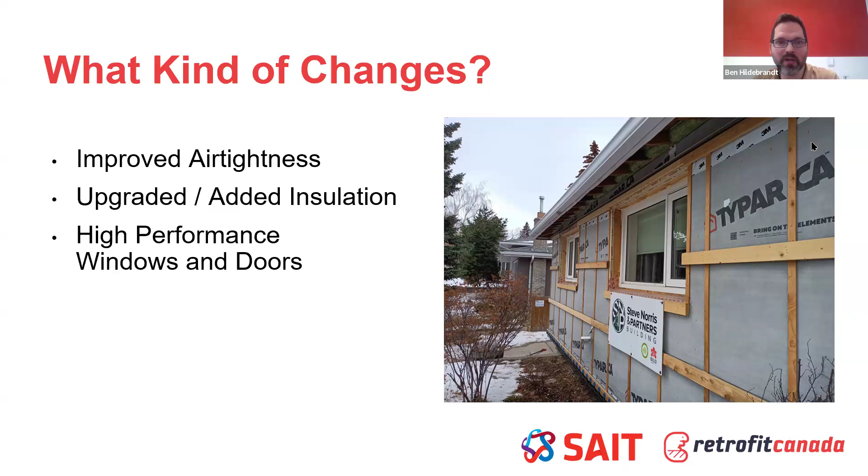And then with the envelope, we're also looking at improving the windows and doors. We want to make sure these are well insulating, and windows can be, in many cases, a thermal hole in the wall. So when we take the time to plan and specify higher performing windows, we can reduce the heat loss from those locations in the building envelope.

Once we tackle the building envelope, we're often in these retrofits looking at electrification. There's a significant number of homes, even in hydro-dominated grids like Quebec or British Columbia, where the space heating is provided by natural gas furnaces. But we can look at changing that and installing upgraded and efficient heating systems that also provide cooling, and providing proper ventilation, which is needed when we make these buildings more airtight. So heat pumps, HRVs, ERVs to provide the ventilation. These are electrically powered systems to provide a well-conditioned and comfortable interior environment for homeowners.

And then also we look at electrifying the domestic hot water systems in a home, standardly these days through heat pump hot water heaters. And then also look at electrifying our appliances. So we look at gas ranges or cooktops, fireplaces as well, though I don't think anyone would argue the fact that there's a significant difference between a gas fireplace and electric fireplace, but some people have been converted to enjoying the aesthetic of an electric fireplace still. But we electrify to make it possible for all the energy of the home to be provided from emissions neutral sources, whether it be a hydro-based grid or from solar right on the home as well.

And then finally, that solar on the home, that renewable on-site energy generation, is the last step of a deep energy retrofit. Once we've reduced that energy load and converted it to all electric, we can look at adding solar onto the top of a home to provide the energy it needs.

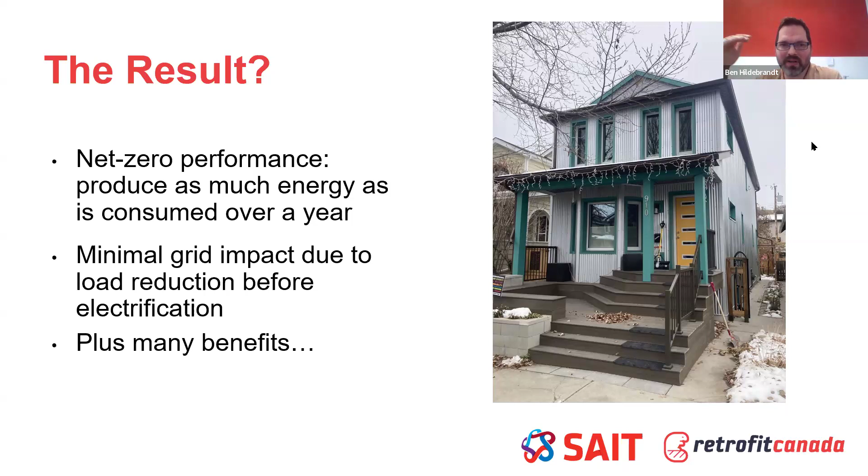So as much as we can reduce the loads, we're going to reduce the peak grid impact and the adjustments and improvements that are going to be needed to the grid as the nation electrifies and retrofits their homes. Plus, beyond net zero and reducing that grid impact, there's many other benefits to a deep energy retrofit. And these need to be much more part of the conversation beyond just let's save energy and reduce emissions, because these are things that impact the day-to-day of the occupants of these homes.

So we have improved occupant health. One of the key aspects of that is having an airtight envelope and having continuous fresh air through a heat recovery ventilator or energy recovery ventilator. We can have continuous fresh air within the home despite outdoor conditions when we utilize proper ventilation and filtration in those systems as well. We have improved thermal comfort. I often think about the impact of just having a warmer living room during the depths of winter where I can still curl up on the couch right next to the window and be comfortable without needing 7 blankets or what have you. We have the energy savings.

We have reduced emissions. There's also noise reductions. When we add insulation to the exterior of a building and we also improve the air tightness, we're going to significantly reduce the noise from outside. And that's a key aspect that people are concerned about when they live next to busy roads. And then also, the last 2 points kind of meld together. We have the extended life of a building. Through a deep energy retrofit, we're renewing the exterior shell of the building. We're renewing the mechanical systems. We're essentially provided with a new building for all intents and purposes when it comes to the work we need to do on our homes to keep them operating.

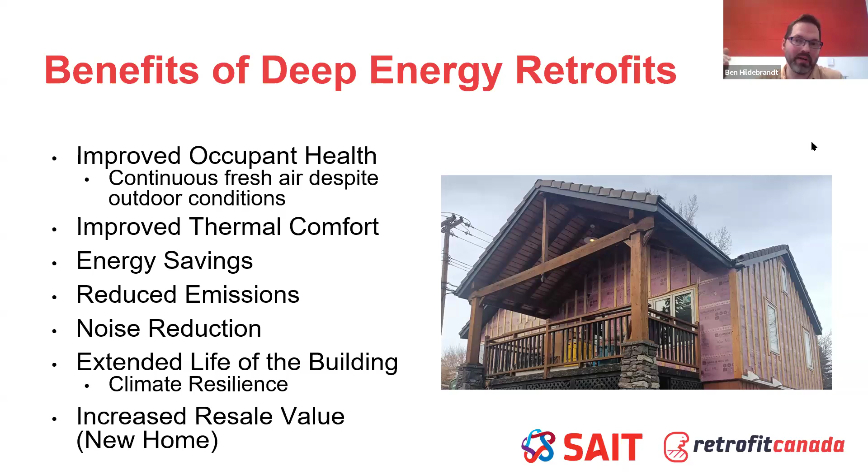And then finally, we have increased resale value. We're essentially left with a new home, and that impacts the value of it, just from the aesthetic renewal of a home and also the energy efficiency aspects and climate resilience aspects. As we go on in time, those are going to more and more impact the resale value of homes as well.

There's really only one key obstacle to a deep energy retrofit that we can't brush over, and we need to acknowledge, and that's the cost. When we look at doing one of these, as some of us refer to as a one-shot deep energy retrofit, doing all the work at once, the costs for renewing the envelope, adding insulation, new windows, new cladding, new mechanical systems, and getting into the attic, addressing the roof as well, that can be $150,000 to $250,000 or even more.

And that varies a lot depending on the specific home and the starting conditions that we're working from. And we need to acknowledge that and work with homeowners to plan how that can be accounted for. And it's also a matter of perspective as well. When we have a home where the cladding needs to be replaced, the windows need to be replaced anyways, we need to consider that cost.

And then what's that additional increase to add the energy efficiency measures to the work that already needs to be done. And then also we need to consider the total cost of ownership of the home. So we look at, we're going to reduce our energy needs. So after that retrofit, we're going to have lower annual energy costs for operating the building.

When we select the proper materials or systems to be installed as part of a retrofit, we can also look at lowering the annual maintenance costs, what it takes to keep that home running, from a materials and system standpoint as well. So we can look at less cost to operate that home after the retrofit that can be accounted for in financially planning that retrofit as well.

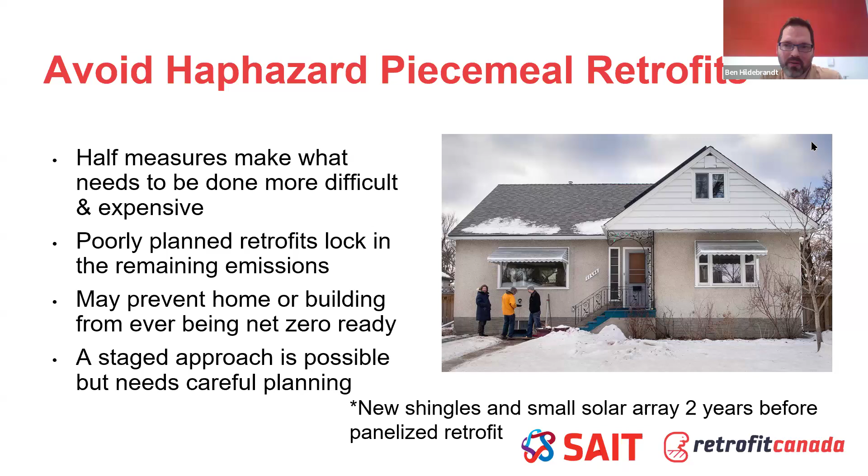And that proper planning can ensure success. But there's a lot to look at with that. We start off with looking at where the building is at now. We complete energy modeling. We kind of go back and forth and how we can improve it, what the different options are, what is the best path to net zero for this particular home. To dial in, I like how Peter Amerongen puts it, what's the best 2050 net zero version of this home?

We need to start with identifying that and then break down the steps it's going to take to get there and create a roadmap to how that home is going to get to net zero, whether it's going to be all at once or whether we're going to break it down into well thought out and well-planned stages to get there, whether that's over a few years or even over a dozen years to capitalize on the life of existing materials within the home. We need to start with a great plan to get there.

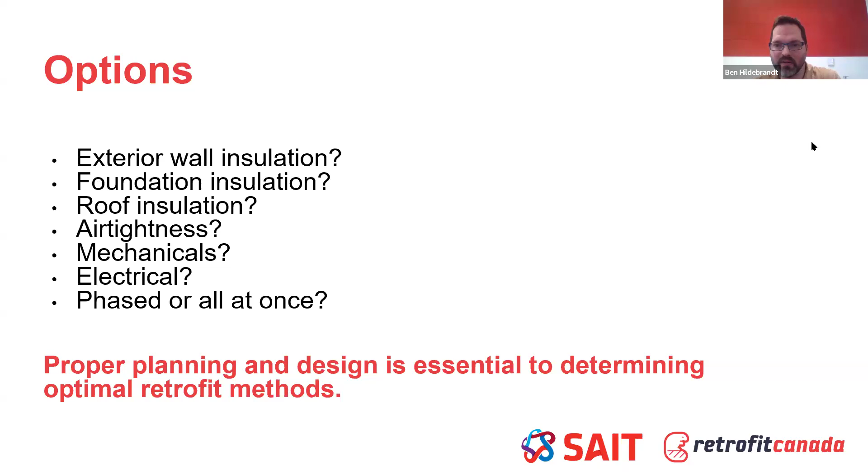And we're working together between Retrofit Canada and SAIT, other organizations across the country as well, to look at sharing knowledge on deep energy retrofits. Retrofit Canada launched earlier this year a revamped case study library. We're calling it a repository of retrofit information. And these are from actual completed retrofit projects. So you can see what was done, where these projects started and where are they now? What was the energy improvement? What was the emissions improvements on these homes, these buildings. The case study that Fellipe's going to present today is in that library as well.

Also at SAIT, we're wrapping up right now the development of an extensive training program for contractors. We're launching the pilot in just another week here, and it'll be a full launch in the fall, partnering with schools across the country to make it available, so we can help scale up the retrofit industry in ensuring that these projects can be properly planned and properly executed. And all of this has been made possible with funding from Natural Resources Canada, and a lot of work's on the go right now. We're looking forward to a lot more work moving forward.

And I'm gonna stop my soapboxing, my rambling here, and pass it off to Fellipe. Thank you. Thanks, Ben. Awesome overview. I have checked out SAIT's curriculum, and it is awesome, and I can't wait for it to kind of hit the retrofit mainstream here in Canada. It's going to be very useful. Thanks for that, Ben. Fellipe, turn it over to you.

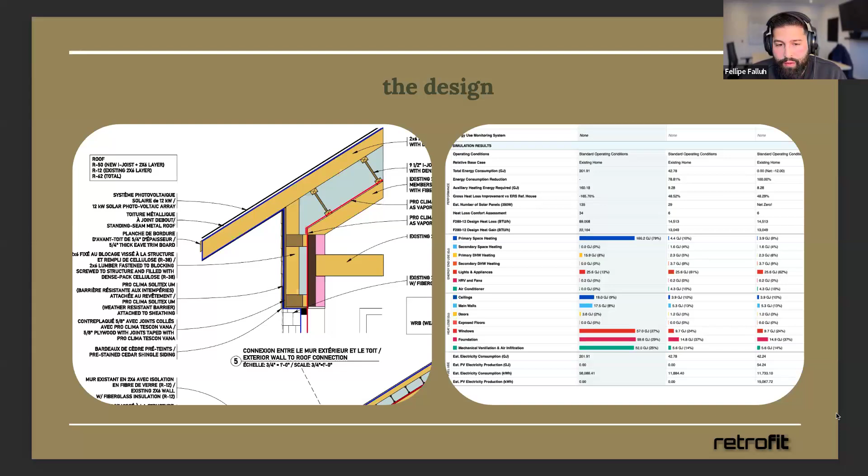I think it was the Volta tool that HomeSol used. It was really good to just try out different configurations, different levels of insulation, different windows, different levels of airtightness, and see what effects it has on the building performance. So we went through a good 3 months of design with structure, architecture, the energy modeler and myself, the contractor, really going back and forth to see what is going to be the full scope of the project.

So this is the before and after of the project. We did start with a very leaky house. You see the EnerGuide rating at 179 gigajoules per year, and we were able to bring it down all the way to 46 gigajoules a year. And then we would add the solar production, which we'll look into after, and it would bring us to a basically net positive house, which is really interesting for a retrofit scenario.

It's not really that hard. It's not really that easy. So we were very excited and very happy with the results that we got. If we see here, we do have a little difference between both EnerGuide ratings for the typical house. It's because we changed a bit the volume of the house, so we needed to take that also into consideration.

So the retrofit itself really focused on two big retrofit methods. First of all, we really integrated the concept of a chainsaw retrofit, a retrofit in which we cut the eaves off. We didn't literally do it with a chainsaw, but it's where we try to bring that house back to a monopoly house with no eaves. In picture number one, we cut basically all the overhangs, rewrapped the house from that point and then recreated some overhangs.

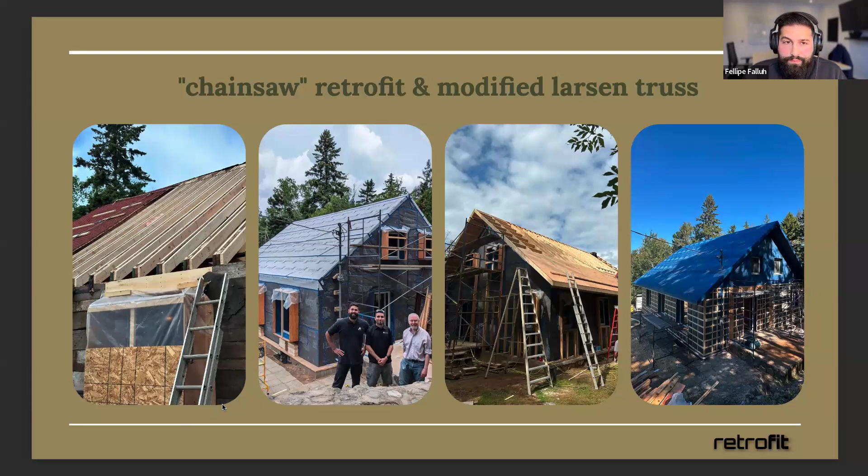In terms of air tightness, we started off at 8.5, even though we've seen much higher. 8.5 is pretty high, specifically for a house of that year. It's not that abnormal, but it's fairly high. And we were able to bring it down already at mid-construction to 0.75 ACH 50. So at this stage, in the first picture here, we had already reached 0.75.

The final air tightness was 0.47, but then at the real final air tightness test, we went back up to 0.7. We had all the mechanicals installed, like the air intake and outtake, and a couple of other subtrades that also passed after that. We lost a bit of air tightness there, but the final result was around 0.7, which was a great improvement over the original 8.5.

For us, air tightness is always the most important. We try to focus more on air tightness than insulation. Actually, insulation is really our third focus. It's always air tightness first, then windows second, and then we speak about over-insulating the building.

The approach that got us to those very low levels was really redundant layers of air tightness. On the exterior we had 2 levels of air tightness. The first one being this monopoly framing air tightness layer, where we have this easy continuous air tightness that goes from exterior walls to roof back to the exterior walls. And the only transition point is at the foundation, where we used a liquid applied air barrier.

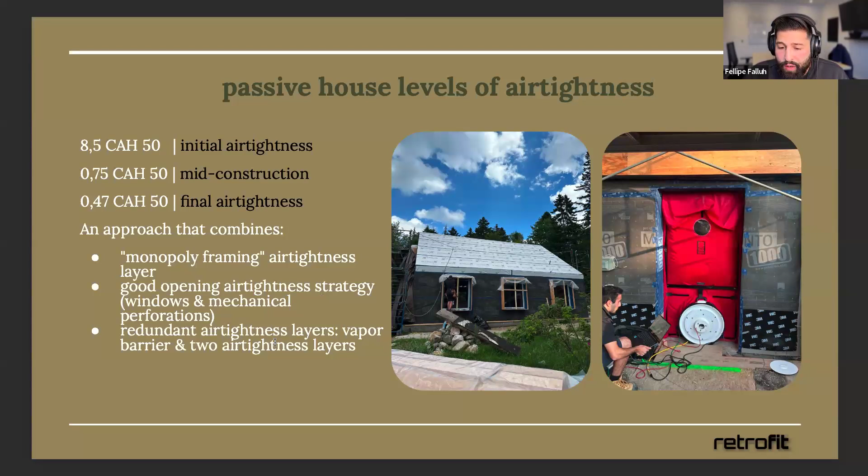Also, I guess testing early and often was very important. We did, I believe, a total of 4 tests in the house. So it's always important to know where we're at, to know, are we doing a great job or not? And do we need to double down on our efforts or not?

Then the mechanical system, also very important. Ben showed that space heating and water heating were basically the big 2 consumers here in Quebec, specifically space heating. A lot of that is dealt with by the envelope. So we're left with basically enough for a very small heat pump to be able to patch for the rest.

And for the domestic hot water, we worked for the first time with a CO2 split system heat pump hot water heater, which is the Sanden SanCO2, which was very interesting. So it's a CO2 heat pump that, like it says, is really a split system. There's an outdoor compressor and an indoor tank, and that is what supplies the hot water to the house.

And that was also where we were reaching a point where we were doing the energy modeling and saw that, well, we can't reduce much more in terms of the space heating with insulation. Maybe air tightness, we could have lowered it more, but the more insulation that we put, we're not really gaining that much. The big consumer was always the domestic hot water. So really going for this heat pump hot water heater permitted us to get that net zero or net positive target that we wanted to reach.

When I say net positive, it means that we do need to have energy production, which is a solar panel array of 25 solar panels of 580 watts. I believe the final design was about 14.5 kilowatts. And this is not installed yet. This is the last thing left on that building. That's why in that other EnerGuide rating, we don't see 0. That's because we're at net zero ready. And we plan on doing that as the last step for the building.

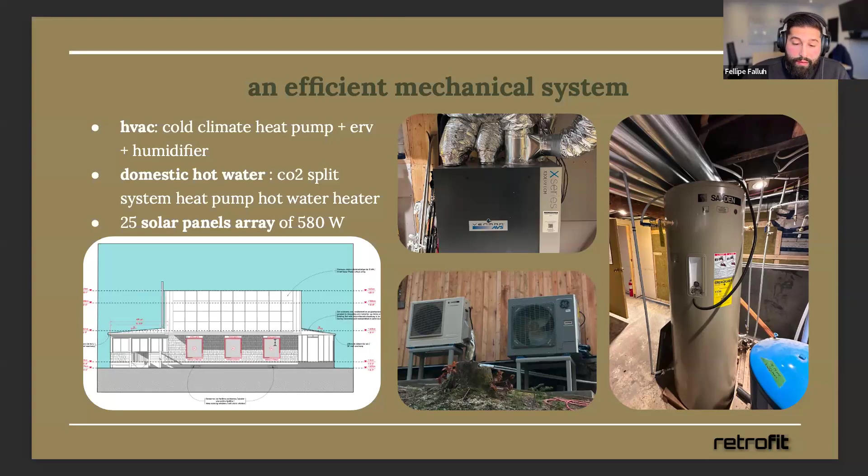Here in Quebec, it's a bit hard to justify solar panels. We do have cheap and very clean electricity. In this case, the solar orientation is perfect. The roof has already been restructured to hold the new solar panels. And the client is also very keen on solar panels. So that's basically the next step for him to be completely net positive.

So in terms of the insulation, here are basically the details that we really worked with. On the exterior walls, we had R22 rock wool. That was in 2x6 bays spaced at 24 inches on center towards the interior. That was something that we weren't really going to touch. There was already, I guess, fiberglass insulation. We weren't going to touch it because we wanted this to be really just an exterior retrofit.

However, after opening up the new window openings, or resizing the windows, we saw a good smell of mouse poop and mouse pee. So we decided then and there to really just open up all the walls. We were there, right? And to change that insulation at that point and re-add a new vapor retarder. So on the exterior walls, we have that Larsen truss, which is about 8.5 inches of dense packed cellulose, bringing us to close to R34.

On the roof, we had the same 2x6, basically real rough 2x6 rafters. And when we reopened the roof from the top, which we'll see in other pictures, we were able to refill that with rock wool insulation. So we had an R22 there. And then with 9.5-inch I-joists and a 2x6, basically creating overhangs, we had R60 of dense packed cellulose on the roof too.

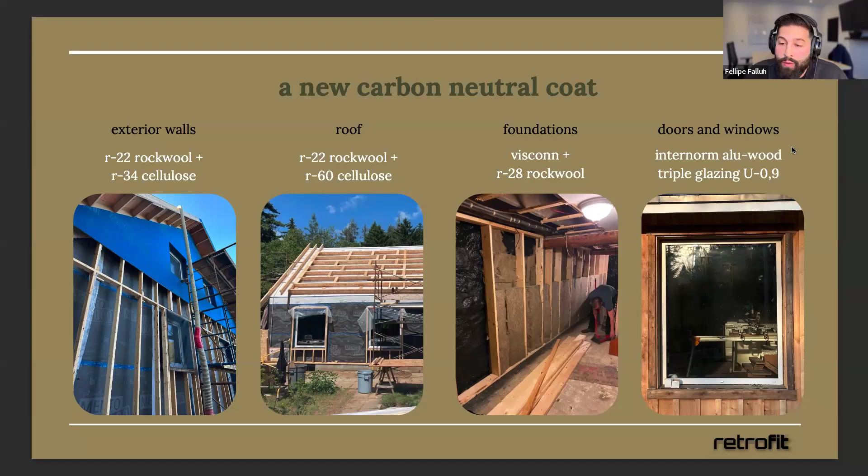So here are other progress pictures of the project. We created those window bucks. It really helped us to get, first of all, ease of installation and continuing our air tightness super well. I told you we had this brick ledge. This was pretty much the same thickness of the brick ledge that the house already had. It was just in very bad shape. So we re-poured about 1.5 inches of concrete on top.

But you see that this house was already kind of asking for that new coat of insulation. And you do see that this wood is that OG mass timber, as I love to call it. So it's really 3 inches of wood. That's called here pièce sur pièce or Quebec frame construction.

Here on the roof, as we had seen on the picture, we cut off the overhangs. We restructured all the roof rafters there by adding new 2x6s on each side. We were adding a considerable load to the roof, so the engineer did ask us to re-sister those rafters on each side.

We added a new layer after that of plywood, a very thin layer, I think it was 3/8 plywood, just so that our guys could really work well on it to install the I-joists and the 2x6s. So that was not necessarily needed, but it was really for the guys to be able to work and go faster on that renovation. So this is the roof with the overhangs that we recreated. The I-joists are right below that.